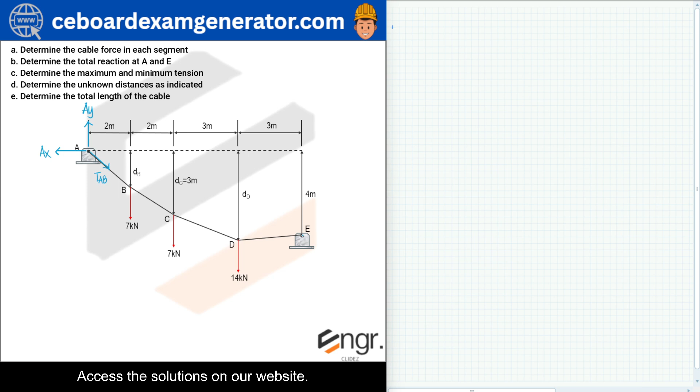Pag dito naman tayo sa joint E, this will be in tension, acting away sa joint E. Ito yung tension ng cable DE. So the reactions here would be, yung components nito to the left and downward. So ito naman, this would be upward and to the right. So this is EX and this is EY. So this is the free body diagram of the whole system.

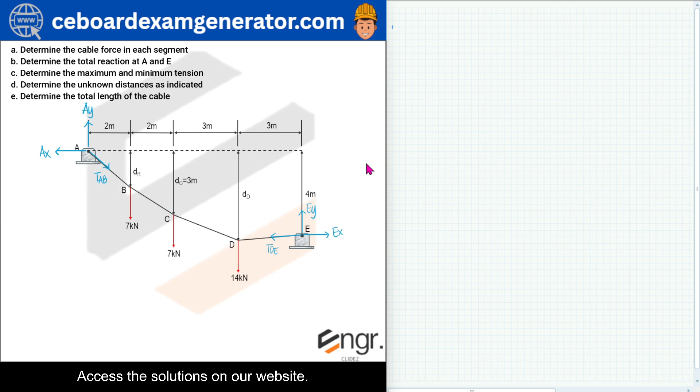Now, considering the whole system, we can sum up moments about point E. So ditong banda, we sum up moments about point E equal to 0. We would have AY multiplied by this moment arm. The total distance is 10 meters. Then minus AX multiplied by 4 meters. This will cause a counterclockwise rotation. By the way, always sa assumptions ko, sa tutorials ko, positive is clockwise, negative naman is counterclockwise. So, we have minus AX multiplied by 4 meters.

Then, 7 kN will cause a counterclockwise rotation about point E. And the moment arm is 8 meters. So, minus 7 multiplied by 8. Then, we have 7 kN multiplied by 6 meters. Still counterclockwise rotation. So, minus 7 multiplied by 6. Then, 14 kN multiplied by 3 meters. Counterclockwise pa rin. So, we set this to 0. This would be our first equation, or equation 1.

Now, for our second equation, we can just consider the summation of forces along the X direction. Considering the whole system, di ba yung horizontal forces lang would be EX and AX. So, ibig sabihin, kung ano yung value ng AX, this is to the left, and yung EX naman natin is to the right, kailangan equal silang dalawa. So, A sub X should be equal to E sub X.

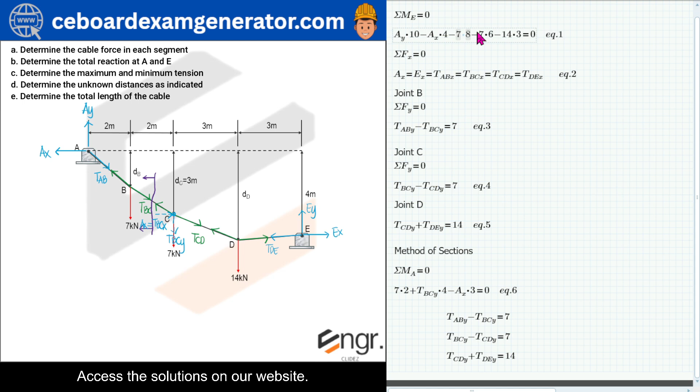Okay na silang tatlo. Since all of the constant terms are on the right side of the equation and lahat ng variables andyan sa left side, we just have to tweak this one: the first equation and the last equation. Equation 6, so we can expand this. I will just leave this as an exercise.

So expanding this, we have 10AY minus 4AX, and we can move 140 sa right side ng equation. So this would simplify into 10AY minus 4AX is equal to 140. So this is our equation 1.

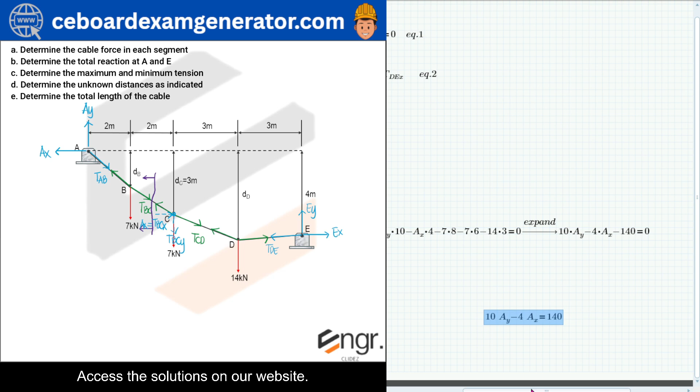And our last equation naman, if we expand this one, we would have 4TBCY minus 3AX. Move natin yung 14 sa right side ng equation. This would be negative 14. So this is now our fifth equation. So for these equations, we have 5 unknowns. We need to express one variable in terms of another.

Now ito yung trick dyan. Recall na yung TABY is also equal to AY. So we can replace this one as AY. Then yung TDEY naman, the Y component of this cable force, is also equal to EY. So we can replace this by EY. Ito na yung final equations natin. So we can play with the following equations.

It's best to express AY in terms of AX. Then solve na natin siya using 4 equations, 4 unknowns, using our Casio calculator. So let's just modify this equation since this is the shortest equation. AY minus TBCY is equal to 7 is the same as AY is equal to 7 plus TBCY. So this is from the first equation.

We substitute this to another equation containing AY, which is our fourth equation. So paste natin yan, and we replace AY by 7 plus TBCY. So ito na yung equation natin. We can expand this. I'll just leave this to you as an exercise. We would have the following equation.

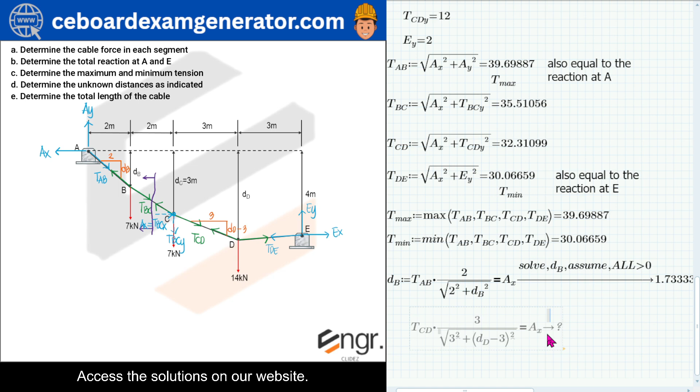Now, for d sub d naman, you may consider TDE or TCD. Depende na yan sa'yo. But ako, gagamitin ko na lang yung TCD. So, TCD multiplied by the horizontal component over the hypotenuse. We consider this triangle. The horizontal distance is equal to 3 meters. And this vertical distance is equal to d sub d minus 3 meters. Yan yung vertical component niya. So, we have 3, divided by the hypotenuse, square root of 3 squared plus d sub d minus 3 squared. Equal yan dapat sa horizontal component ng cable, which is still AX. Then, solve natin yung d sub d.

So, right now, we have 2 roots. We have 1.8 and 4.2. So, alin yung pipiliin dyan? Notice na sa figure natin, d sub d is longer than 3 meters. So, hindi pwede yung 1.8. Therefore, we assume only values na greater than 3 meters dapat. So, yung 1.8 will be excluded. 4.2 yung sagot natin. So, this will be d sub d. So, meron na tayong d sub b and d sub d.

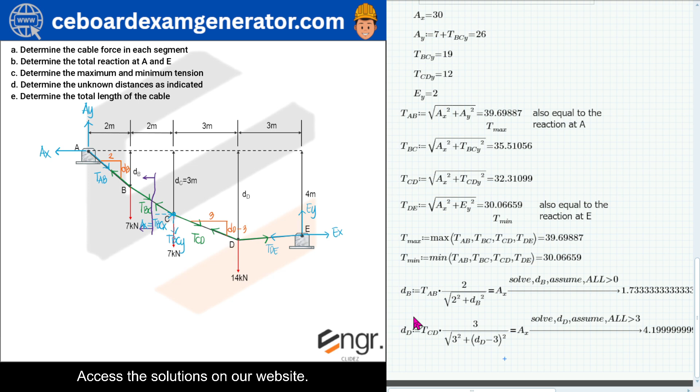Yung last na isosolve natin, yung total length ng cable. For the total length of the cable, we just need to add all of these lengths. If we look at BC, we draw this triangle. The horizontal component is equal to 2 meters. And this vertical distance would be 3 minus dB. And if you look at this triangle for DE, the horizontal component is 3 meters, and this vertical distance would be equal to d sub d minus 4.

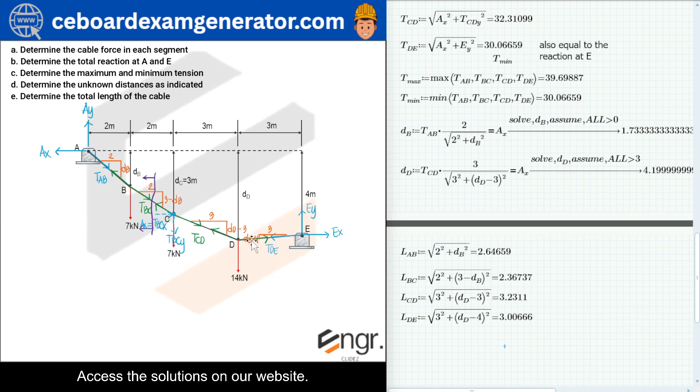So, add na lang natin lahat. Yung length ng AB is equal to 2.64659, square root of 2 squared plus dB squared. For BC naman, we have 2 squared plus 3 minus dB squared. Then for CD, we have 3 squared plus d sub d minus 3 squared. This would be 3.23. And the length of DE is equal to 3 squared plus d sub d minus 4 squared. Adding all of them, the total length of the cable would be equal to 11.25172. So ito na yung summary of answers natin.